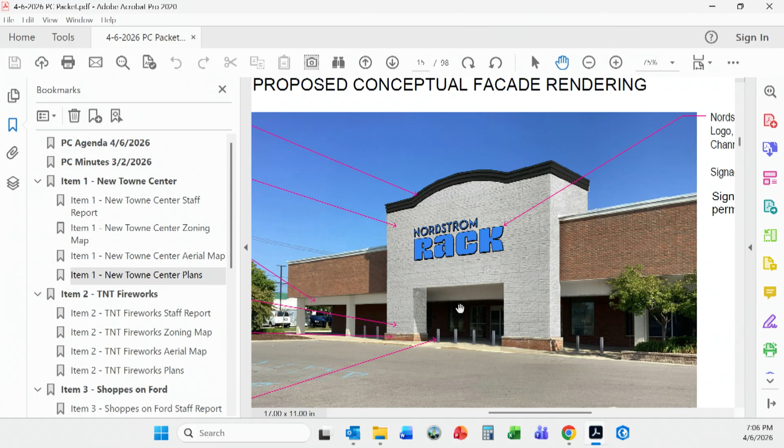And up on the screen here, it shows a picture of the existing Joann store where it has the sign, and then directly underneath the sign in the middle, and then on the right and left-hand side on the columns, there's EIFS and some decorative elements there. What Nordstrom Rack proposes to do is to remove the EIFS on the columns and underneath the sign. The coping at the very top, to have that as a darker color.

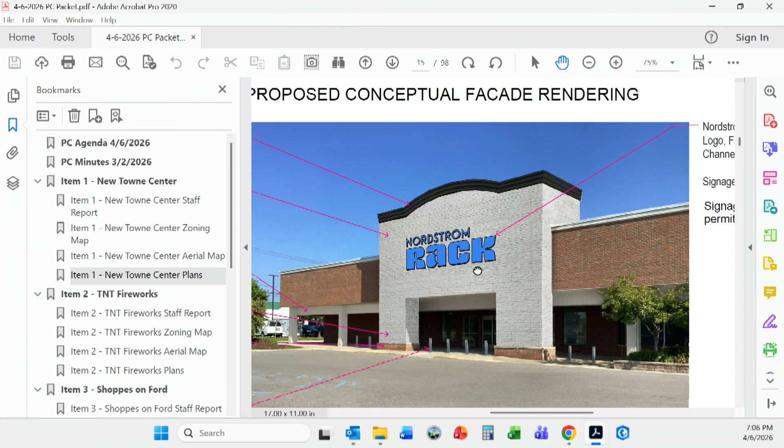It looks black or maybe dark bronze. And then probably the most significant change that's proposed is to stain the front brick as it's shown in this picture here, and I'll zoom in here. And they propose just staining the brick that's shown in the picture here. There are some other columns that are already painted left and right of the entrance. So they may be repainting those and touching those up. Primarily, the staining of the front facade is the main change.

Right now, it has its natural color of brick, and the natural color is what was previously approved in the original application when the site was approved several years ago. So whenever there's a major proposed change of staining a brick, we refer those to the Planning Commission just because of the significance of the change. We've done it probably the last few years with maybe half a dozen different commercial buildings. Some have proposed paint, some have proposed lime washing. In this case, staining is proposed. Originally, paint had been proposed.

We recommended not painting it because paint can encapsulate the brick and trap moisture. So in the freeze-thaw cycle, painting it can actually damage brick. But there are some stains and lime washing that allow the brick to still breathe. So the applicants have proposed a product of stain that will allow it to stay porous and to breathe. And it's like a type of white color. The specifications are included in the packet, but this is a visual representation of what that stain would look like.

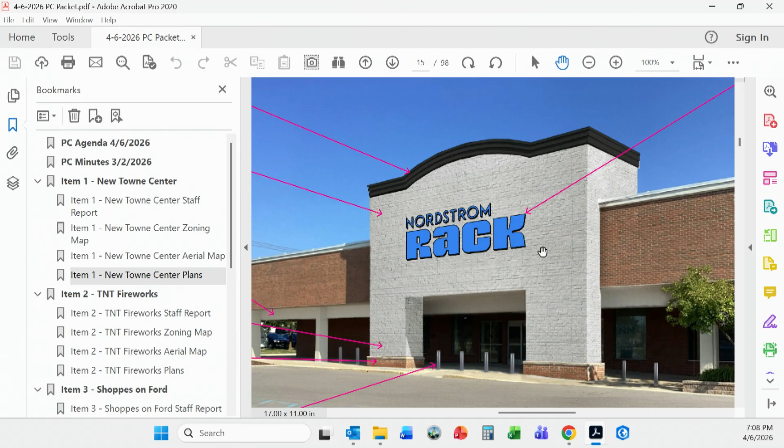So our staff recommendation is that if the stain product and the color are acceptable to the Planning Commission, we would recommend approval of the proposed stain of the brick for the facade. So that concludes our staff report, and I'll be happy to take any questions. Thank you, Patrick. Project sponsor, do you have anything to add? Okay. Said nothing to add for the record. Okay. Very good.

Karen, I'll start with you. Any comments, thoughts? None for me. Okay. Alan? No comments. Commissioner Cruz, I should say. Commissioner Walther. Commissioner Foster. No comment. All right. Commissioner Weber. No comments. All right. Commissioner Lee. No comments. Commissioner Singh. No comments. And Commissioner Watkins. No comments, Madam Chair. All right. Anyone want to make a motion? I have no problem with this. I'll make the motion. All right.

I move to approve planning application PZ26-00043, stain the brick on the front portion of the facade at 44740 Ford Road, parcel number 039990026-708, as illustrated on the plans material submitted by the applicant. Second. All right. We have a motion by Commissioner Weber and support by Commissioner Walther. Any further discussion? All right. Anybody? Commissioner Lee, could you please call the vote?

Yes. Commissioner Cruz. Yes. Commissioner Foster. Yes. Commissioner Lee. Yes. Commissioner Singh. Yes. Commissioner Walther. Yes. Commissioner Watkins. Yes. Commissioner Weber. Yes. And Chairperson Zuber. Yes, motion carries. All right, so Patrick, next steps? Sure. The next step will be for the applicant to submit any building plans to the building division for those changes, and the planning division can approve those changes as part of that permit. There's a separate permit that's already in for building. We've approved the planning division portion of that, so those permits can proceed.

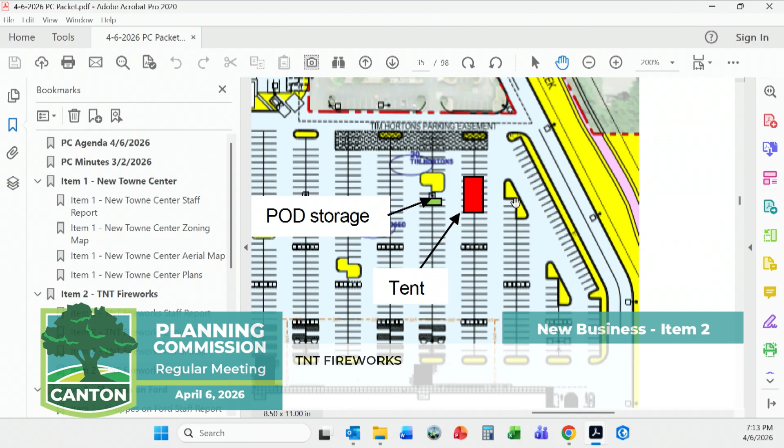Thank you. All right. Patrick, I have a question because on the aerial map, it shows the pod in a different location. So I assume this is accurate on this drawing? Yeah, the aerial map, there was a previous version that showed the pod east of the tent, and the pod had it actually been east of the tent would be within the 250-foot setback from the residential district farther to the east. So I think the map was created, and then once we had measured the setback, saw that was under 250, we contacted the applicant, and then they promptly revised the plan and showed it west of the tent.

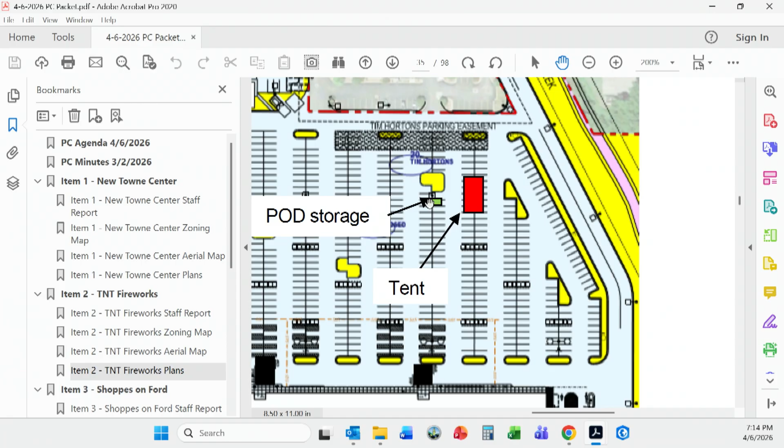Thank you for clarifying that. So the plan is the one that would prevail. Okay. Anybody on the commission have a problem with this? Okay, I'm entertaining a motion. I'll do it. Okay. Brian's being awfully quiet tonight, so.

I move to approve planning application PZ 26-00056 for a 30-day seasonal sales permit for the TNT Fireworks Company at 45001 Ford Road, parcel 058-99-0003-723, commencing on June 18th, 2026, as shown on the plans, and subject to obtaining appropriate permits and inspections from the Building and Inspection Services Division for the tent and any applicable signage.

Further, I move to allow staff to approve annual renewals for seasonal sales permits that do not have any material change from the previous year, with material changes determined at staff's discretion. Support. All right, we have a motion by Commissioner Weber and support by Commissioner Foster. Any further discussion? All right, Commissioner Lee, could you please call the vote?

Commissioner Cruz, yes. Commissioner Foster, yes. Commissioner Lee, yes. Commissioner Singh, yes. Commissioner Walther, yes. Commissioner Watkins, yes. Commissioner Weber, yes. And Chairperson Zuber. Yes, motion carries.

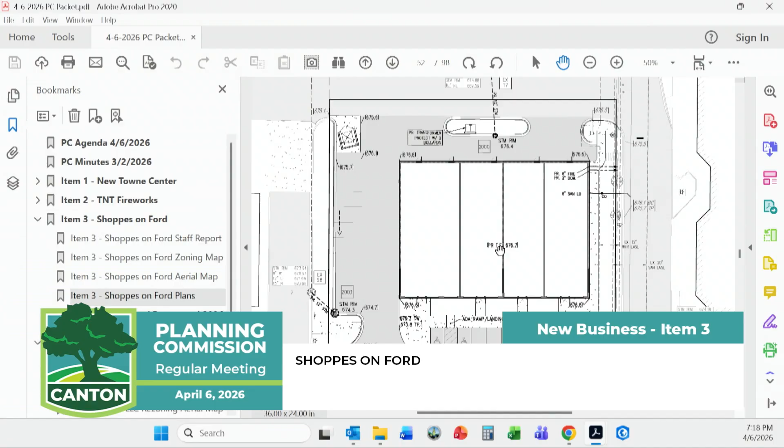And we'll start with just the black and white plans. So the parking will be in the front on the south side with the building on the north side. As you can see in the plan, the parking lot in the front will generally align with the parking lots to the west and to the east.

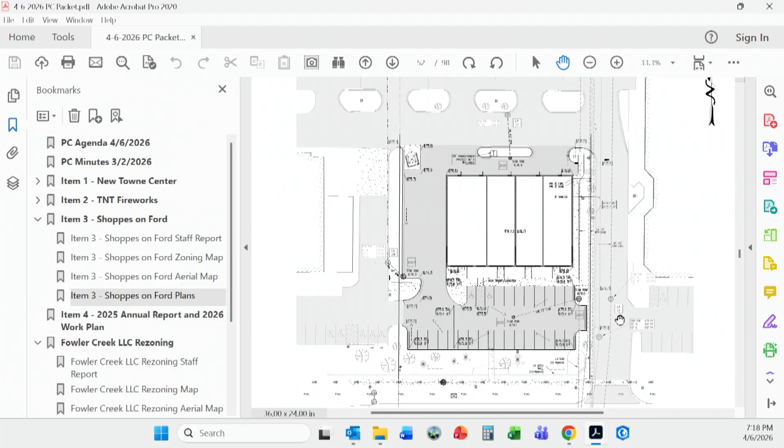In terms of the access management, the only access into the site will be from the common drive to the north, or from the adjacent Buffalo Wild Wings site to the west. I'll zoom in a little bit more to the southeast corner. There is the boundary of the parking lot, and there's a little bit of curbing here for turning around, but there's a hard curb here. So there won't be traffic turning into this site so close to Ford Road.

So if there's traffic coming from Ford Road, the traffic will have to go all the way north to that common drive and then turn in from the north. This way, if there are cars and they're waiting to turn left because of traffic, that allows for a lot of stacking along this drive.

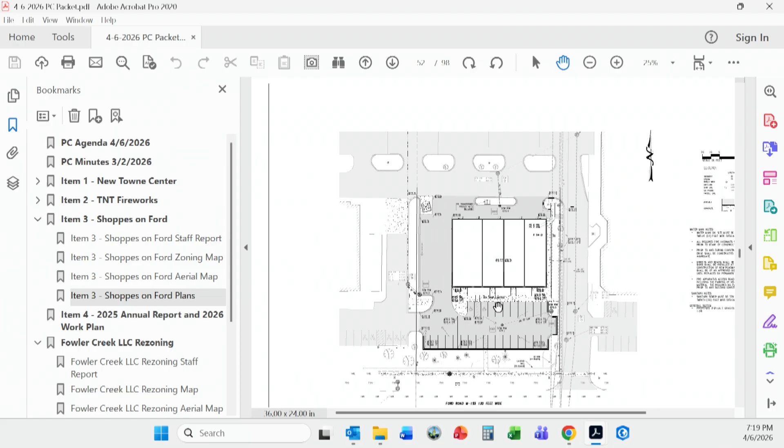Some other elements of the site are that recently there was an easement that was given to MDOT. As you probably know, MDOT is proposing a boulevard project along Ford Road, and the project has been in the plan design stages for a few years, and the final designs are in the process of coming together, and there's more information on MDOT's website in terms of the timing of it and some of the initial designs of the plan. And in the frontage area here, this dashed line is the easement that was provided to MDOT.

So what that does is it effectively narrows the landscaping area along the frontage of Ford Road. In the long range, I don't think that this will be unique in terms of additional easements being granted to MDOT and having some narrowing of the front landscape areas along Ford Road in the Central Business District and DDA area. But a lot of the actual width of that frontage landscaping will depend on what MDOT does within that easement area.

Looking at MDOT's most recent plans, it appears that the sidewalk illustrated on the most recent plans is very close to the existing sidewalk that's there today. And so it is possible that although MDOT has additional easement here, and this easement I think is 9 feet wide, there may be very limited development within that easement. More than likely, having underground utilities, but the sidewalk may be in its current location, and we may get the full landscape width here of 25 feet required by the ordinance.

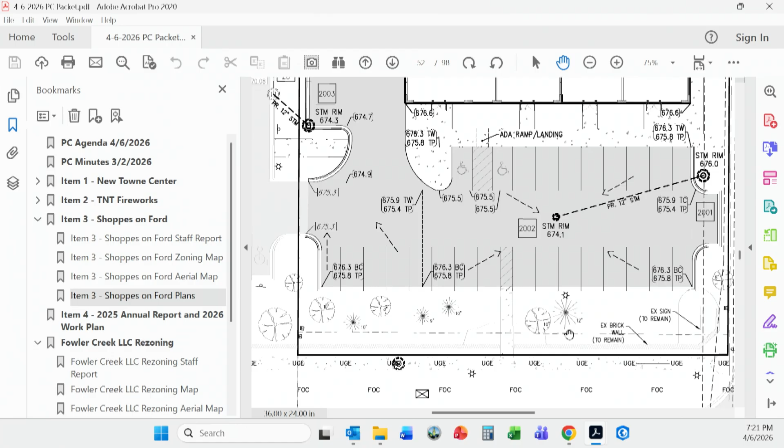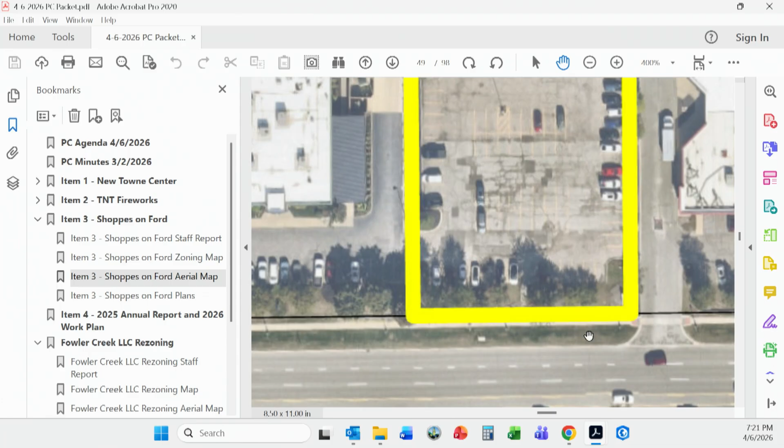I'll bring up the aerial map to try to illustrate this in a little bit more detail. So it's a little difficult to see, but underneath the boundary line that's in yellow, there's the sidewalk there. And then south of the sidewalk, there's quite a bit of green space there, almost enough space for an additional lane. So if there's widening of the road, there's some existing easement in which to widen the lane. With that additional 9 feet that MDOT acquired, they can move the sidewalk north. That can allow for further widening. So that will be known once MDOT has the final designs.

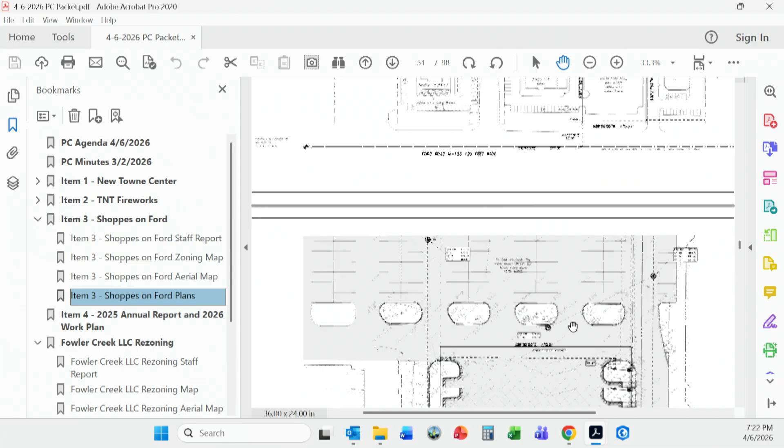But as these go along the corridor and these easements get acquired, it's going to be looked at on a case-by-case basis in terms of what the impacts are. Probably the greatest impacts on sites will be their frontage landscape area. In some cases, some sites may have their parking impacted by potential easement areas. But in the case of this site here, the biggest site impact is just the width of the landscape area going from 25 feet down to 16 feet based on the easement.

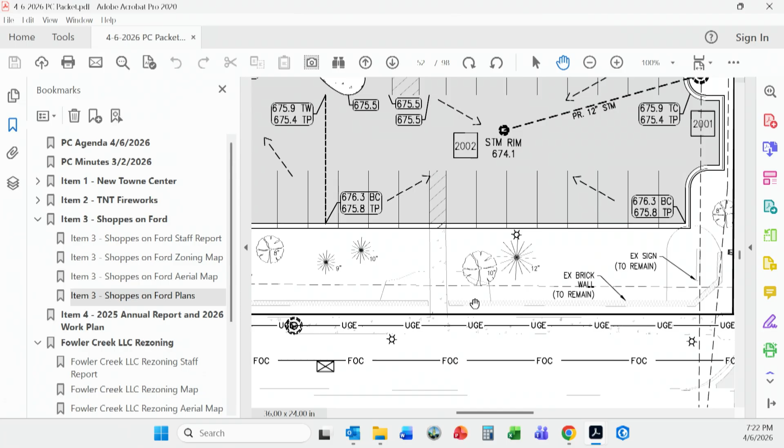And again, it is possible that once the boulevard and everything is rebuilt, it is possible to have the full 25 feet width of landscaping. Some of it would just be in MDOT's easement. So just a little tidbit there in terms of the boulevard and the easement. And in the future, as we see more projects along Ford Road, this will continue to come up in terms of any new easement areas and any new plans that are available from MDOT at that time.

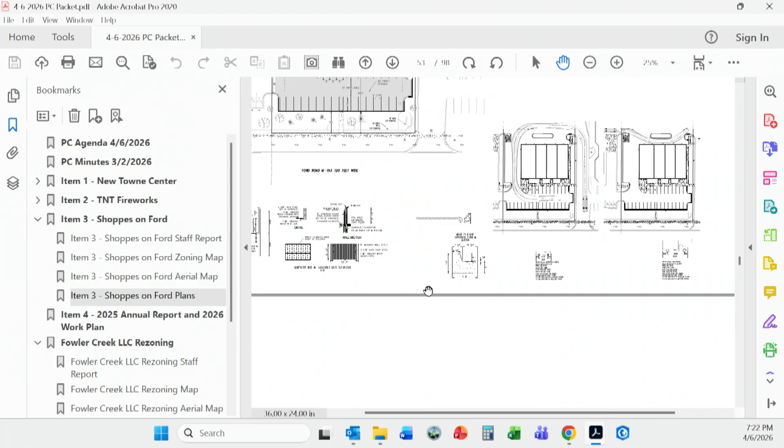Some of the next areas that we'll look at, I'll kind of skip through some of the design things in terms of circulation and photometrics and things of that nature. Most of the standards of the ordinance are met other than where we note at the end of our report in terms of our recommended conditions of approval. And

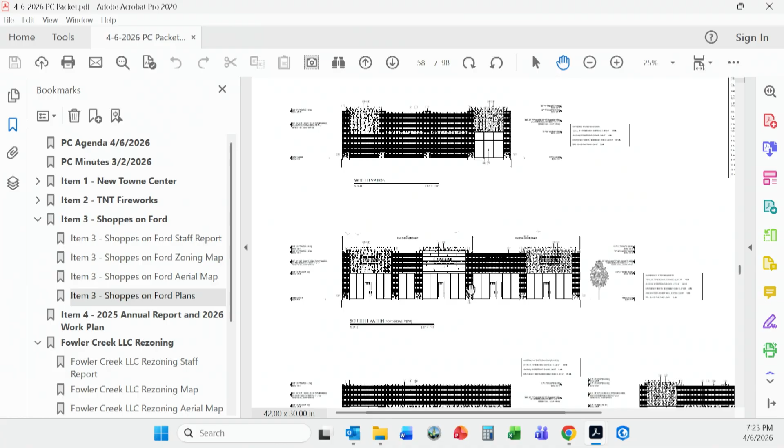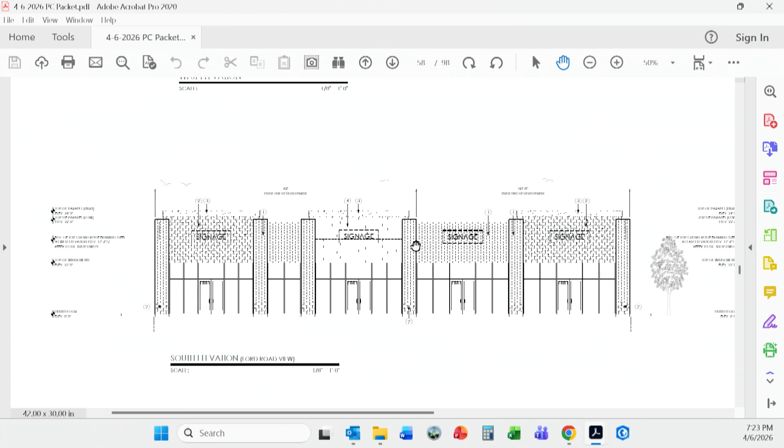here's on one page the black and whites of the shopping center. So there will be a color version of this I'll show in a minute. The color version that's in the packet is based on a previous version of the plan, so the color version of the plan was updated. But the front of it will be mostly glass, and the ordinance requires at least 60% glass on the frontage.

The primary masonry material will be brick, like a dark gray brick. And then on some of the upper areas, there's a burnished block that's like a tan color. And then above one of the main shopping tenant areas, rather than brick and burnished block, it's going to be a fiber cement siding. Along each tenant center, there's a brick column to provide depth. And there are some varying heights of parapet walls to provide a little bit of vertical breakup of the facade.

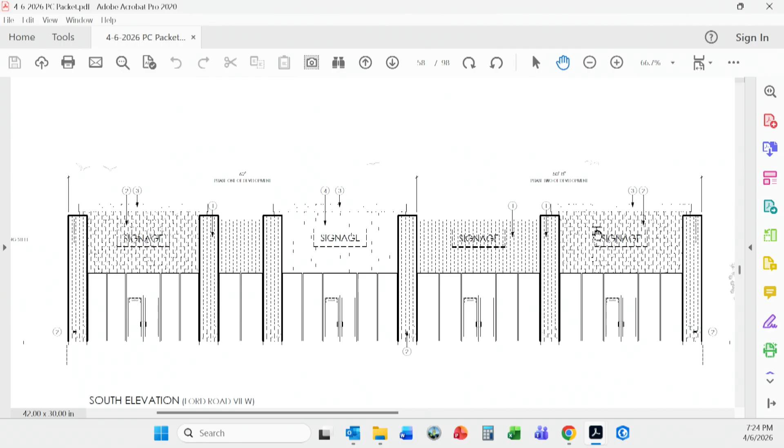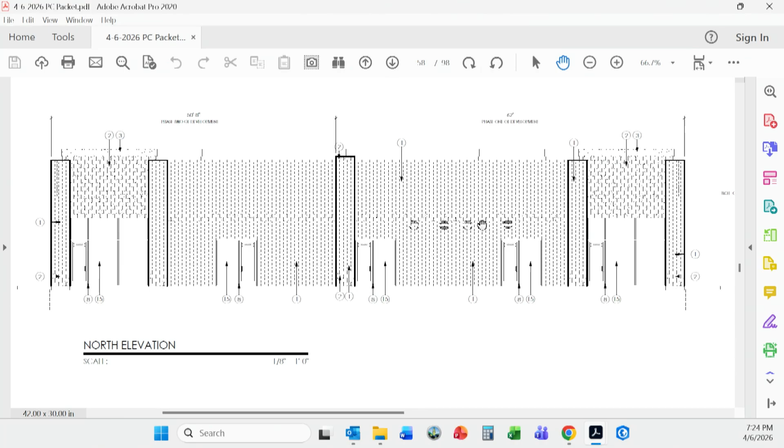In the rear part of the facade, let me go to the north part. There we go. So on the north elevation, they're also proposing columns to break up the long expanse. This is the rear portion. And on the ends, they propose glass and then rear doors on each side. And then both the east and the west sides will have glass near the front and then columns along the sides to break up that long expanse of facades.

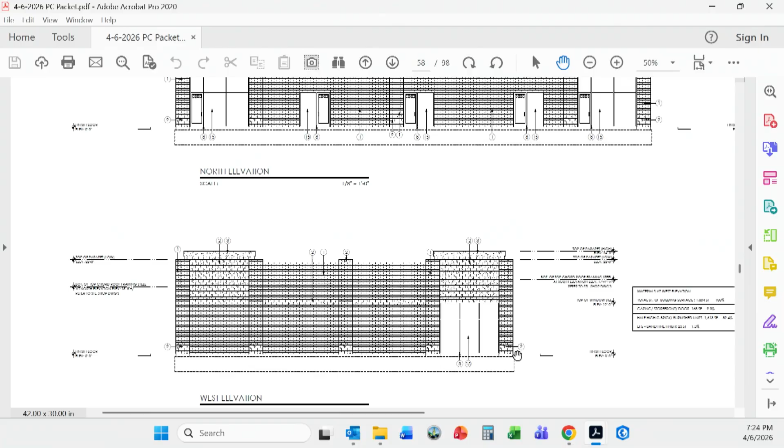And the zoning ordinance has design standards that are separate for shopping centers and the DDA areas. Many of those standards overlap, but between commercial shopping centers and DDA areas, there are some minor differences between those and how they overlap and interplay. So in terms of the development itself, we recommend 4 conditions. The first is selecting a grout color that's lighter than the brick. In the material table on the architectural page, it states proposing a black grout.

A black grout with a dark gray brick is pretty stark, quite different than what we have on Ford Road. We have had a few buildings recently where a darker gray brick has been used and looks good, but in those cases, the grout has been significantly lighter than the masonry material. So we recommend a lighter grout.

The second condition is including community amenities on the site that are required by the ordinance. Community amenities can be artwork, and in this case, the site's in the DDA, so there's an opportunity to dedicate an area of the site for art as part of the DDA's art program. There can be other amenities that are closer to the building. One of the amenities is already there, and that is allowing outdoor dining in the southwest and southeast parts of the building. There are areas where those particular tenants could have outdoor dining, and that's an amenity. Other amenities could also include bicycle racks and like clock towers, things like that.

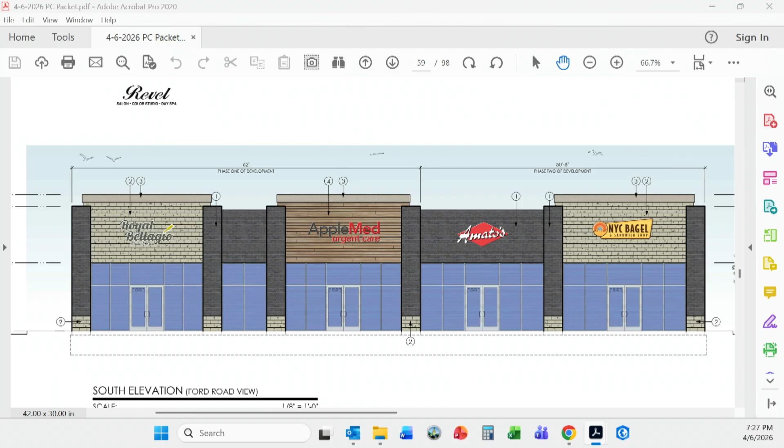Thank you, Patrick. Is the project sponsor here? Would you like to add anything to what Patrick already said? Hello, I'm Evan Priest. We prepared the site plan for the project. Thanks to Patrick for his, as usual, comprehensive introduction to the project, and I'm not sure in light of that I have much to add.

Asmar, West Bloomfield, Michigan, representing the owner. If you guys have any questions, I know it's kind of different with the Phase 1, Phase 2 of the design. Yeah, tell us your name again, I'm sorry. Randy Asmar. Asmar, okay, thank you. All right, anybody have any? I do. All right, well, let's start with Commissioner Weber.

Can you tell me a little more about this easement? Was that required by the township, or was that required by the original developer? In the original development, the REA for the whole property with the big shopping center behind coincides with the neighboring tenants with Buffalo Wild Wings and the Verizon shopping center owners as well. So there's a lot of deeded restrictions on the site throughout the whole property.

So this easement is expiring? The easement regarding the development of the size of the square footage will expire depending on a tenant in the back's lease. So as of right now, the way the building sits on that site, only 5,000 square feet can be developed. And that's what's being proposed, and that restriction will leave in potentially 2 to 3 years. If that tenant leaves? Correct, or it will dissolve off if they extend. But it's all controlled by the main property owner, which is, I believe, Ford Lilly, who owns the shopping center behind.

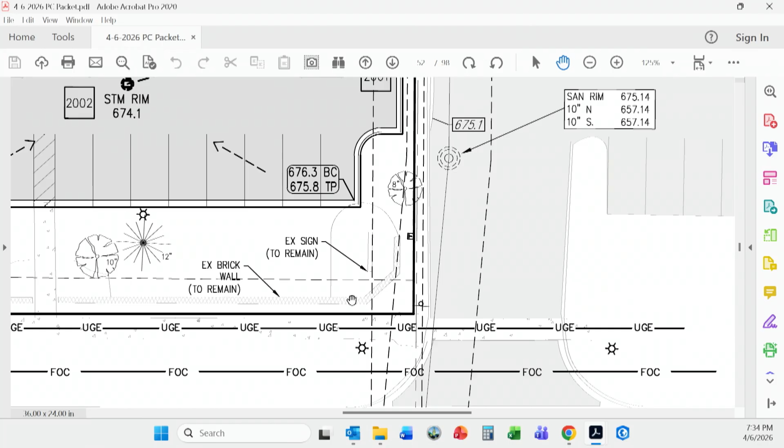The second item, is that at Ford Road where that existing sidewalk is? Is that proposed sidewalk where that crosshatch is proposed or existing? Can't hear you. That's the existing DDA wall. Now, whole thing? Can you show the ADA spots with that striping? Oh, pan down a little. He said DDA wall. I'm sorry, there is a walk connecting the parking lot to the existing walk on Ford. Can you zoom out a little, please? There. So that's an existing walk?

No, that's proposed. Okay. What I suggest is, if that's proposed, I think the ADA striping should line up with that, and you create a crosswalk. So you could just shift over those ADA spaces, or shift over the proposed walk, just so that there's a clear crosswalk connection, just a striping exercise. It's a better design. You okay with that?

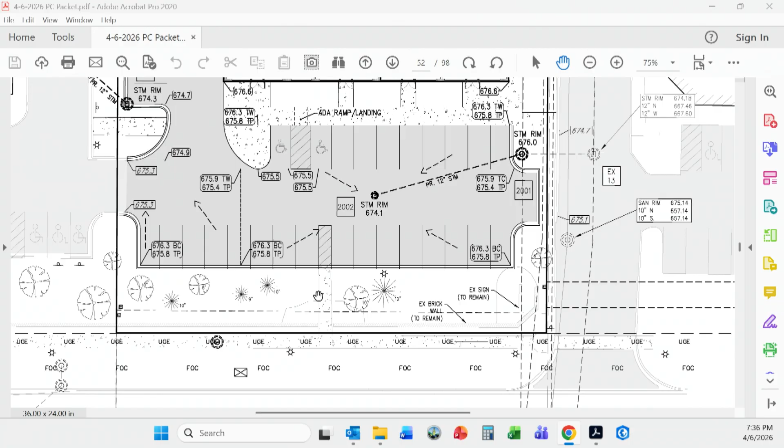And then just the last thing is, do you have tenants already agreed to these yet? You have none yet? Okay. That's all I got. Okay. Commissioner Walther. Nothing for me. Okay. Commissioner Lee. You answered my questions. Okay.

Commissioner Singh. Just a clarification, that crosswalk seems like it's an existing walk already connecting to the Ford Road walkway. I just looked at the satellite. Yeah, we can put up a current aerial here that's going to be a little bit sharper. Okay, yes, that walk is there.

Sure. So the point is, try to make it as perpendicular as possible, not diagonal, so adjust your striping accordingly, right? Yeah. If that walk is existing, move your ADA spots so it lines up at least. It's a safer design. Yeah, so I think that would just be where there's the space here, doing the cross striping there, and just shifting those spots over. Makes sense. You won't lose any spots. No. Okay.

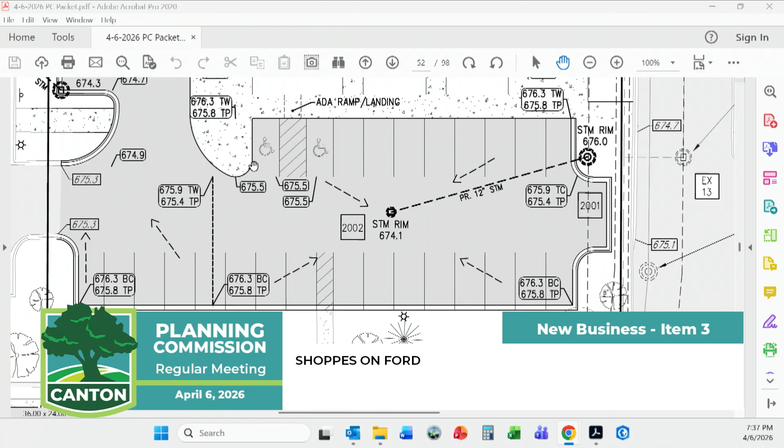My only other concerns, Patrick, are the parking. I know Buffalo Wild Wings has a very heavy patronage. A lot of people park in that parking spot right now. If you go in the evening, it's pretty much half full, sometimes more than half full. So are we using the parking lot in the main parking area in the calculation, or are these enough spots here?

Yeah, actually with Buffalo Wild Wings, the way that their parcel is, they don't really have wayfinding signage for this, but their, I'll call it auxiliary parking, is actually north. So on their property, if there's overflow in the main parking lot, most people are gonna park to the east. I've done it myself. But where there's a new use and those spaces are occupied, they'll have to park farther north, and I parked there too for Buffalo Wild Wings. All right, that's all, Madam Chair.

Commissioner Watkins. Thanks so much. So just a couple quick things. When you start to look at Ford Road, for me, it's notorious to think about on that north side, especially in the area that we're talking about developing. It's that last piece that kind of blocks the visibility into the greater development that's there. It fills it in, and now we have no visibility as you travel westbound to the greater development that's behind it. And I get it.

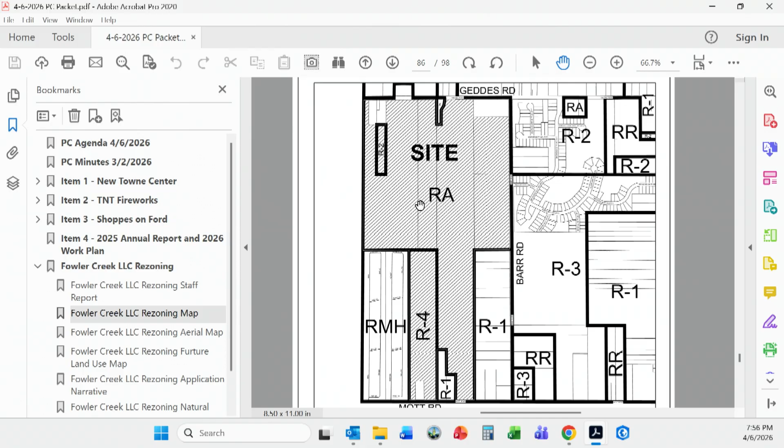And bringing up the zoning map here, it's a little difficult to see the entire site, but the entire site is hatched. It's the subject site that the applicants have. And even though this area in the southwest is hatched under R4, it's already zoned to R4, so it's not subject to this specific request. And on the zoning map, as you see with most of the site, it has a zoning of RA, rural agricultural. And that's the one zone in the community that we allow for farming.

Next, I want to go to the future land use map of our master plan just to kind of illustrate some of the boundaries. So in this northern area that's yellow, the master plan recommends 2 units per acre. This middle area that's a darker yellow is recommended in the master plan for 3 units an acre. And then this light orange area to the south is recommended in the master plan as 4 units per acre. And some of these future land use districts split through a parcel. So in our staff report, we note these as area A to the north, area B in the middle, and area C to the south.

The applicant is proposing to rezone the site to R2 in area A, R3 in area B, and R4 in area C. And the applicant proposes to rezone it according to what's recommended in the master plan. So the R2 district proposed on the north side of the site corresponds to 2 units per acre. The middle of the site, the proposed R3 district corresponds to approximately 3 units per acre. And in the south side, the R4 district corresponds to roughly 4 units per acre.

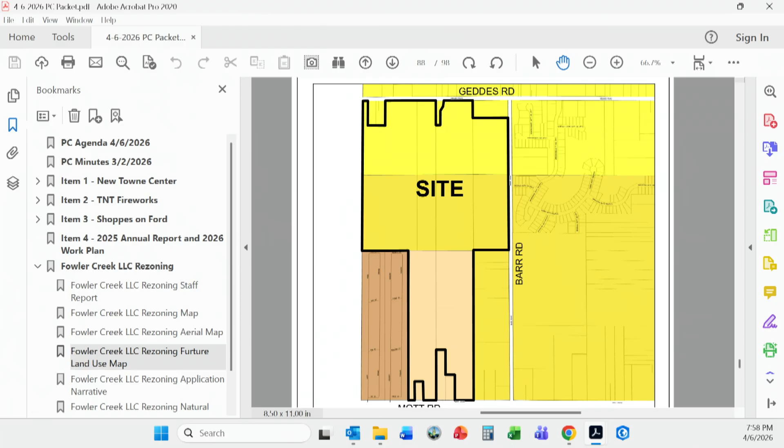In terms of some history of this site, many years ago in 2004, areas A, B, and C were actually rezoned from RA to R2, R3, and R4 respectively. So it was a little unusual to see 22 years later an identical rezoning application. What happened back in 2004 is that the areas were rezoned to R2, R3, and R4, just like they're proposed this evening. And there was a development proposed at that time called Ridgewood Manor. The Ridgewood Manor development was not pursued. In the 2000s, we had a big housing crash nationally, so a lot of projects were put on hold and canceled. This was one of them.

Subsequent to that, there was a farmer who acquired these properties and applied to rezone them back to the RA district. And so in 2013, these parcels were rezoned back into the RA from the R2, R3, and R4. And having that RA district allowed the continuation and expansion of the farm. So that's just a little bit of the history of the site.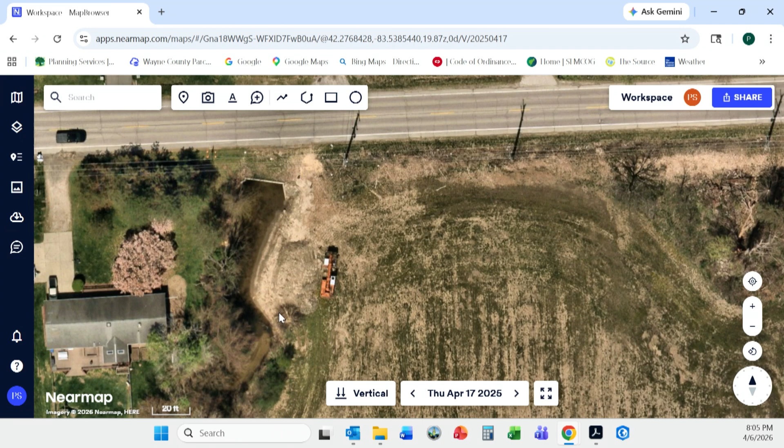And there's some heavy equipment here. And before, if I went to the aerial photo taken before, this area is overgrown with vegetation. That's in October 2024. We skip ahead to April 17th. That vegetation is cleaned, the debris is cleared, and the water can cleanly flow northward underneath Geddes going north.

And at previous Planning Commission meetings, when the Everbrook development was considered, the applicant had given a slideshow of all the different blockages and sediment that were in many of these creek areas. And I think this was one of the pictures they had where there was a lot of sediment in this creek. That's since been cleaned out. That maintenance took place, according to the aerials, roughly April of 2025, about a year ago. So there was some maintenance there that allowed that creek to flow.

Also, on Barr Road, there was some gravel added to Barr Road. It may have been elevated maybe about 6 inches with a crown, and I think one of the purposes of that was to try to hold back some of the sheet flow. Some of the stormwater complaints that we had heard about with regard to Grandview is that during a heavy rain, some of the water would just sheet flow across Barr Road from the agricultural field.

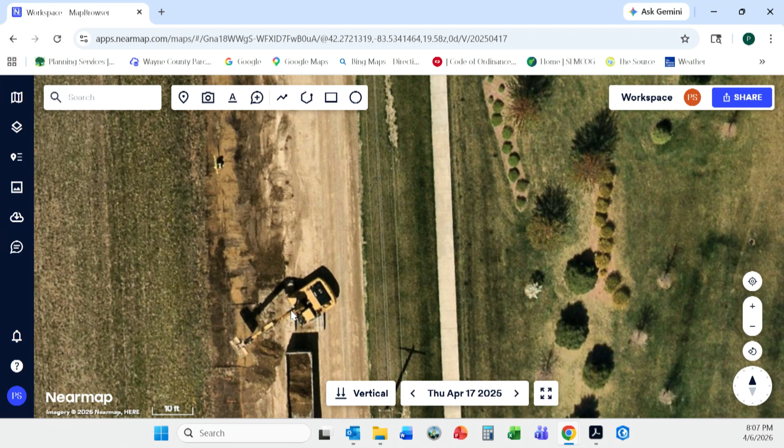So there were a couple of strategies that were implemented. First, there was gravel added to Barr Road. I think it was raised roughly 6 inches, and that allowed raising of the road. Also, there was cleaning out of the ditches. And we can see in this aerial photo here where there's a machine digging out a ditch on the west side of Barr Road to allow that water to be held back and channeled.

So that, in conjunction with adding gravel to the road, has helped in the area. I'm not saying it's a cure-all or a panacea, but those are some strategies that were implemented roughly about a year ago to try to help with the overall drainage in the area. At previous meetings, the applicants for Everbrook have discussed some of the ongoing maintenance that they've done on the Everbrook site, as well as some of the future maintenance that they've proposed to do on the site going forward in conjunction with that proposed development.

So those are a few things that are a little beyond just the technicalities of a rezoning, but they are important because they are present issues that are ongoing. Drainage and flooding are issues that always come up with any kind of development in this area and recently many areas of the community. So we want to present that information, even though some of the future design and some of the future calculations are going to be more related to a site plan or a future PDD application that may come if the rezoning is successful.

There are issues that we want to bring up at the point of the rezoning application, just to put those issues at the forefront in terms of what we would be looking at going forward in terms of any development, and then also being able to express any expectations that we have in terms of the future and what we want to see on the site and how we want it to function.

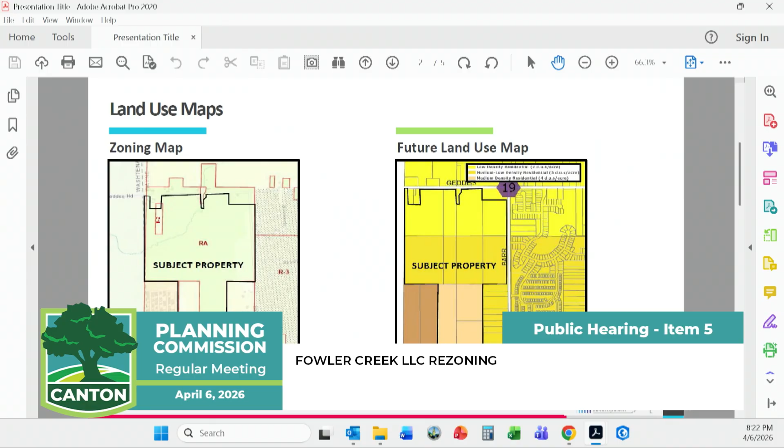So the zoning map and the future land use map, this was obviously talked about extensively by Patrick. Chief among the zoning classifications is RA. Patrick mentioned this, but a prior development group in 2004 actually rezoned these parcels to exactly what we are requesting this evening. And the rezoning requests that we're making are consistent with the future land use map and the township's recently adopted master plan. So the designation in yellow, I'm sorry, I have contacts, but my eyes aren't that good. I know the top district corresponds with R2, that's 2 units an acre. The middle, the slightly darker yellow or orange color is R3, 3 units an acre. And then the subject property that's more in that tannish pinkish color, R4, which is 4 units an acre.

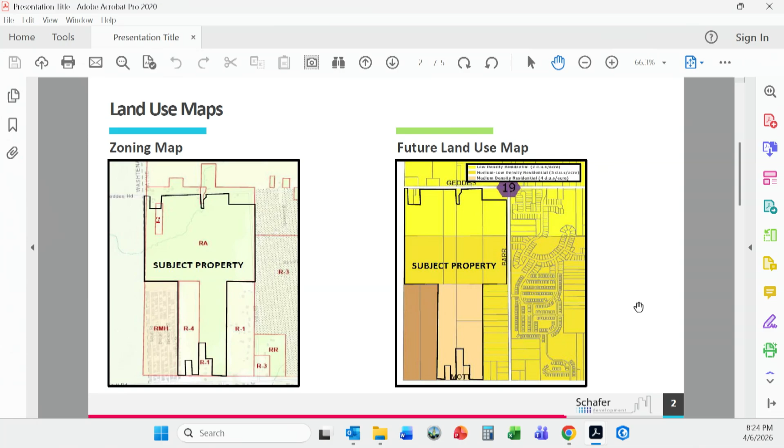And again, as Patrick stated, that parcel that's directly adjacent to the manufactured housing community directly east of it already actually has the R4 zoning. So what we're proposing is completely in line with the township's master plan vision, how they want to see properties developed in the community in the future. Next slide, please. So here, I just wanted to showcase what that looked like again. As Patrick stated, it's a little bit of a unique designation split because it's not really along parcel lines, it's part of parcel lines.

So what we ended up doing on that exhibit in red with our civil engineer after we completed our boundary survey, we actually created legal descriptions for each of the 3 future land use categories. So we could directly state how many acres were within each of those designations. And as Patrick stated, we performed a calculation that was just a general calculation, again, 2 units, 3 units, 4 units an acre, times these acreages, and that's how we arrived at a total density. Now, we're going to get to it in here shortly, but there are some natural features on the site.

We've actually completed a wetland delineation with Barr Engineering. I think there may be under half an acre of wetlands in total on the property. We use Barr substantially. We actually have a walk with EGLE, the state of Michigan, the reviewing agency who's in charge of that confirmation, set here for next month. So we're going to get those wetland boundaries. We've already identified them. We're going to formally get them confirmed by EGLE.

In terms of the floodplain, we are performing what is called a HEC-RAS. There is a Zone A designation on the property by FEMA. FEMA just produces general maps. I frankly can't tell you what it's based off of, how they create those lines. It's not really in line with the topography of the site. But we've completed a topographic survey that looks and evaluates the contours of the land, where the water is kind of naturally running off to. And the point of the HEC-RAS model is to utilize the topographic data.

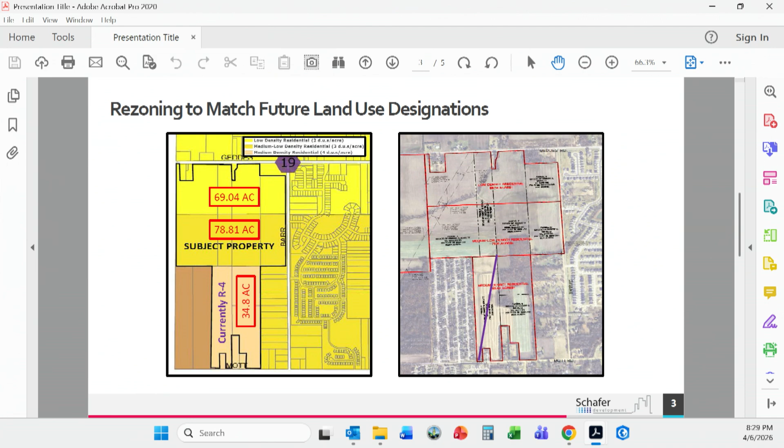As I stated, right now I don't have any pictures, but the Fowler Creek on our property is like a deep V. It falls about 6-8 feet. There's a cavern in the middle of the property where all the water's diverted to. A natural channel design is an interesting concept that has been employed a lot recently. Jamie Burton, I know, has done a number of these, including opening up the Rochester Creek in the city of Rochester and the city of Rochester Hills.

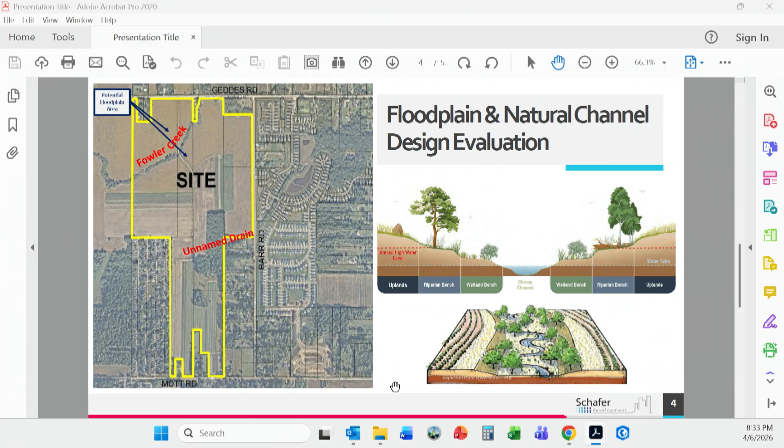So with that, I really want to thank you for the opportunity. Obviously, we talked about a bunch more topics outside of the rezoning. We've got our contact information on the next slide. My brother Aaron has a bunch of cards that we would like to pass out to some of the neighbors after this meeting to stay in contact. But I'd now like to pass it back to Patrick and the commissioners, and hopefully this was an informative presentation and we can answer any questions you may have.

Thank you. Thank you. We need to open a public hearing. Madam Chair, I move to open the public hearing. Support. All right, we have a motion by Commissioner Weber and support by Commissioner Foster to open a public hearing. All in favor, please say aye. Aye. Aye. Any opposed? All right, we have a public hearing open.

I have a few requests that I would like to review before I accept people up to the podium. First of all, I just want to clarify that we, as a planning commission, have specific, I need my glasses for this, we have specific procedures for reviewing and approving or not a rezoning request. And this is a legal process that comes down from the state of Michigan.

And I also should say that we, as a commission, make recommendations to the Township Board of Trustees. We're not the final decision maker. We make recommendations. But there are standards of review that we must consider, and Patrick went through some of these in his presentation, but I'm just going to outline what they are real quick. There are 10 of them.

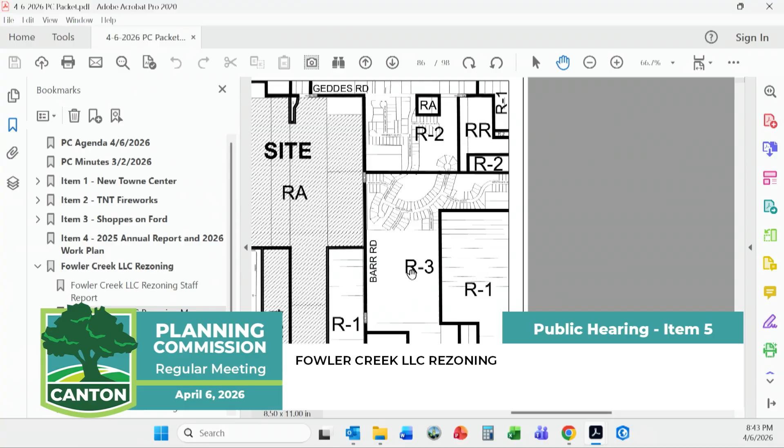So my concern, well, first of all, I second a number of the points that were brought up just moments ago about the road and the traffic and pressure on that road, obviously water runoff, now that you'll have more hardscape in the proposed area. Oh, sorry. Let me put my military voice on, sorry, it's been a while.

My concern here is certainly water runoff and retention mentioned, but also the amount of personnel, amount of traffic that will be imposed, and light that will be now emanating from the new area that will be developed. I didn't really intend to buy into a high population area. I thought I'd build out in the country, and when I bought with Pulte, I thought I was doing that somewhat, knowing, of course, that development is possible.

But I would propose that the density rating, R3, be granted at the highest, that would be the highest level possible. I would rather it all be R2, but okay, to that point. I'm not interested in R4 at all. I'm almost adamantly opposed to that because we're not looking for another commerce area, another zip code to be created from a high population area. And that's what we'll have here, I'm afraid, if we go into that. And that's approximately 1/3 of the total area proposed. So thank you very much. Thank you.